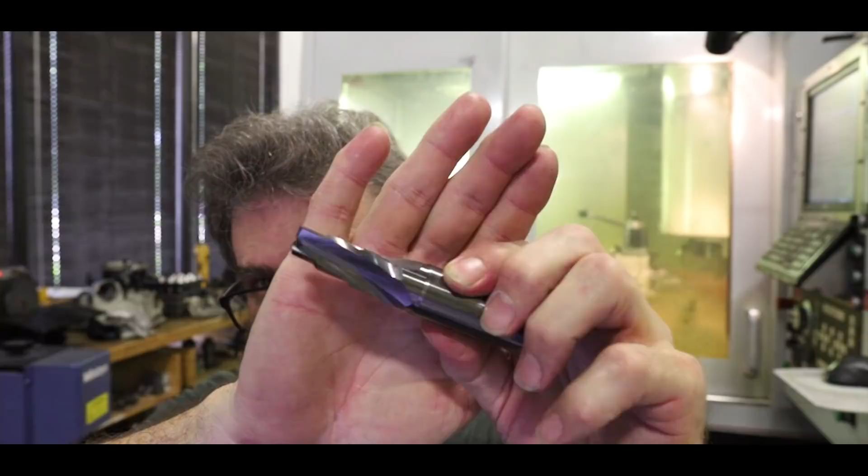Let me see if I can get the focus. This is a form tool of some sort to make some kind of a port. Not really sure what kind of a port it makes, but it's 7/8 diameter solid carbide, 4 inches overall, and they gave me the dimensions of this. I just got to grind it to their dimensions.

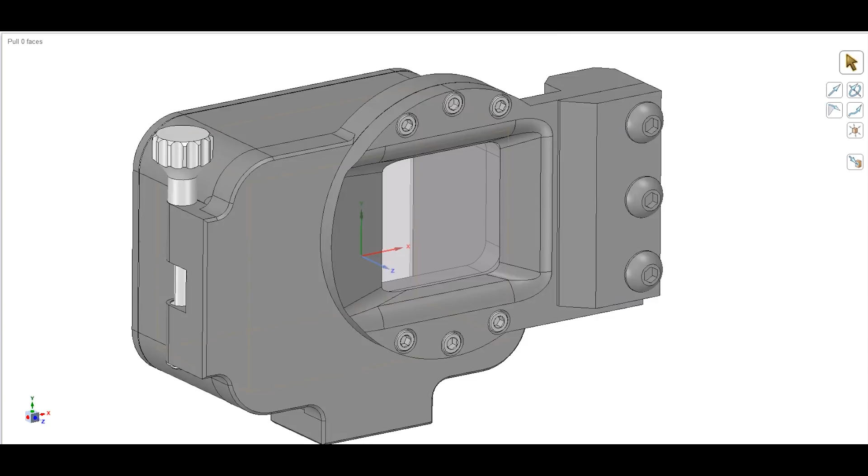Here's my latest idea on the GoPro case. It's to redo this front bezel area so that it works like my original idea. It's more or less the same. This would just mount on the front of the case as I've built it right now.

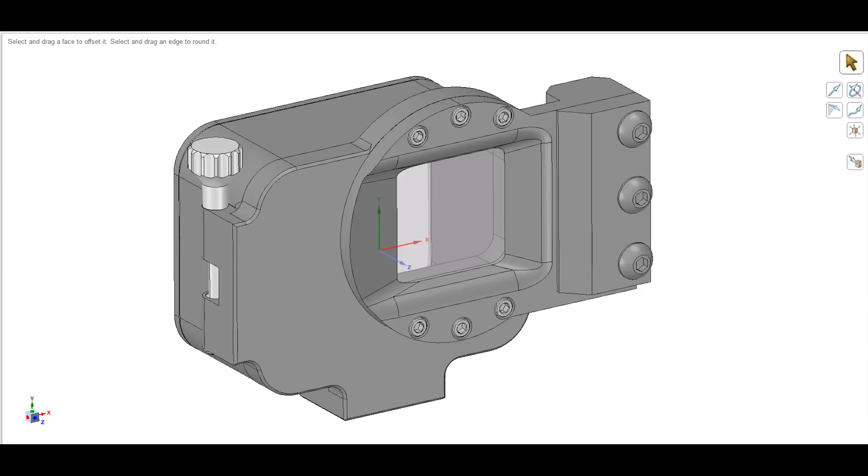So if we hide the various components, this is the original case that had the round air knife thing on the front of it, and we just mount this on the front here. Let me select this here, and we'll cut a section through here.

So the way this works is the air comes up through this fitting down at the bottom here. I'll put like a barbed hose fitting of some sort in there, the pipe thread, and it'll come out here, and it blows through this - there's a very thin gap.

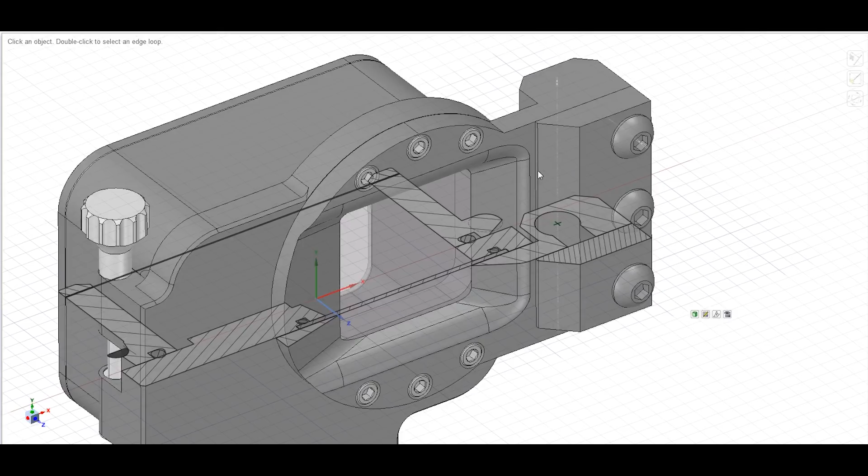On the first one, I put just a piece of Mylar packing tape and cut out the inside of it here so the air would blow through it. It left a gap of about 2.5, maybe 3 thousandths of an inch.

So the air will flow down and around this radius and down across the lens cover and then out here. This will work very similar to my original one I made for the GoPro Hero6 case. So this is the latest idea on this case I'm going to try, and we're going to see how this works.

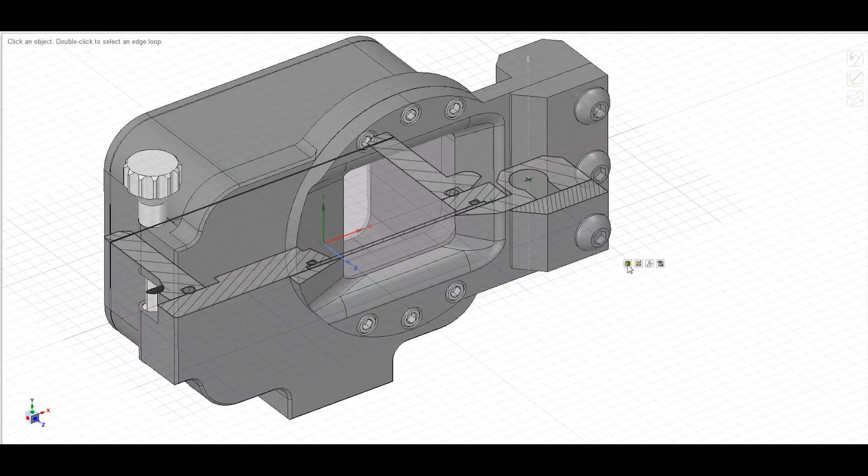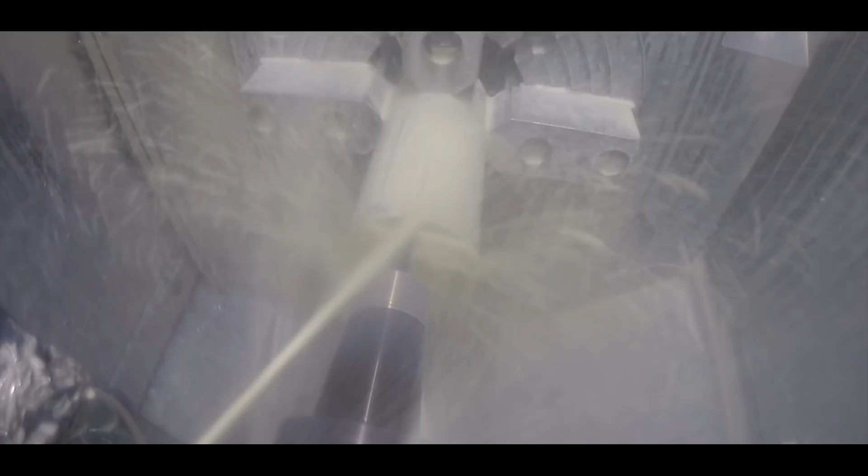Here's the start of the rear frame that holds the window on the body of the case. Just facing the bar off square. Come back here and mill out the outside shape of the part. I'm actually going deeper here than is really necessary for the part, but you'll see later on why I did that.

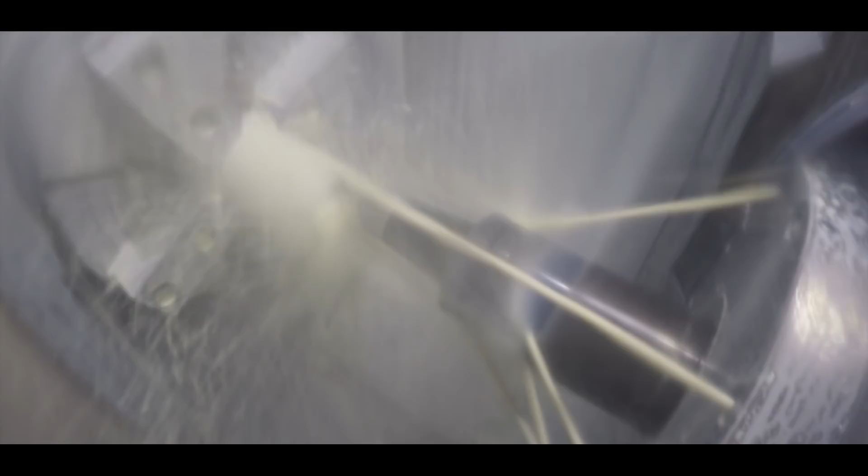So here's the 1/2 inch 4-flute end mill, just taking out the bulk of the material. There's a lot of coolant here, but I really can't mill this without coolant. On that aluminum, it would load up that end mill and cause problems. So then change to a 1/4 inch end mill just to finish the walls right here.

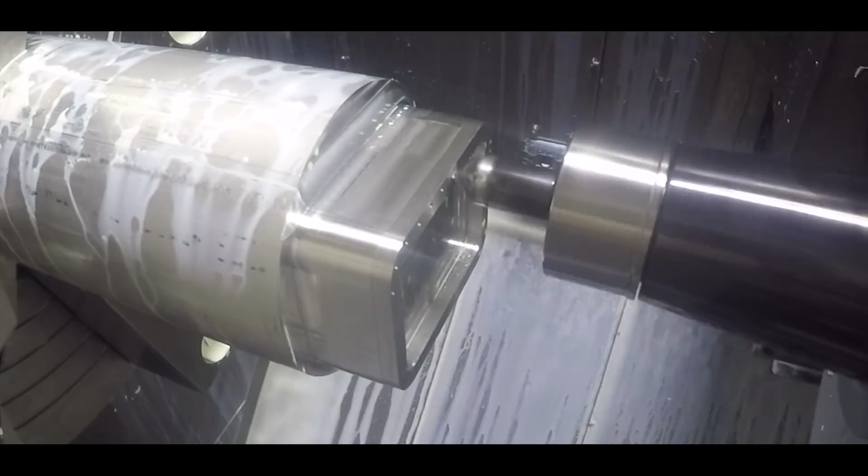Inside and outside. Come back with a spot drill for the hole for the screws. These are going to be 0-80 screws holding this back piece on, so they're pretty small screws. There's quite a few of them.

For some weird reason, the CAM software put a kind of unusual path there. There's these 2 holes that are drilled later afterwards for some reason, but I just left it alone. Here's the clearance drill for the 0-80 screws.

Come back with a countersink for the heads, and then compare it to the screw. Needed a little bit more, so ran the tool again. And then check it again.

It seemed alright, so I ran it all the way around. It's kind of hard to touch up a countersink tool because the point doesn't come to a real sharp point, and you have to kind of fiddle with the offset a little bit to get it the right diameter. So that's the countersink, and there's a little chamfer on the OD just to break the corner off.

And here's the 5-axis move just to cut this chamfer on the ID. I didn't have a chamfering tool and I didn't want to grind one with the appropriate angle, so I did it this way.

And here's the reason that I had to cut the extra clearance there. You can see that arbor would have hit the round bar on that saw if I hadn't milled it away.

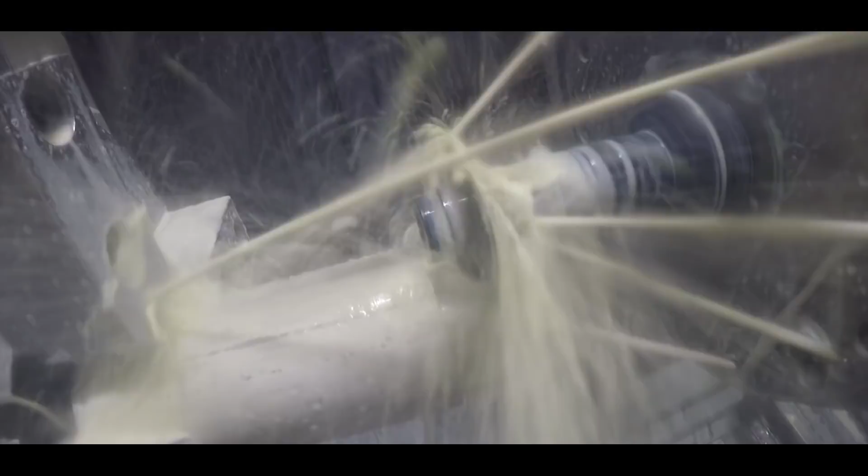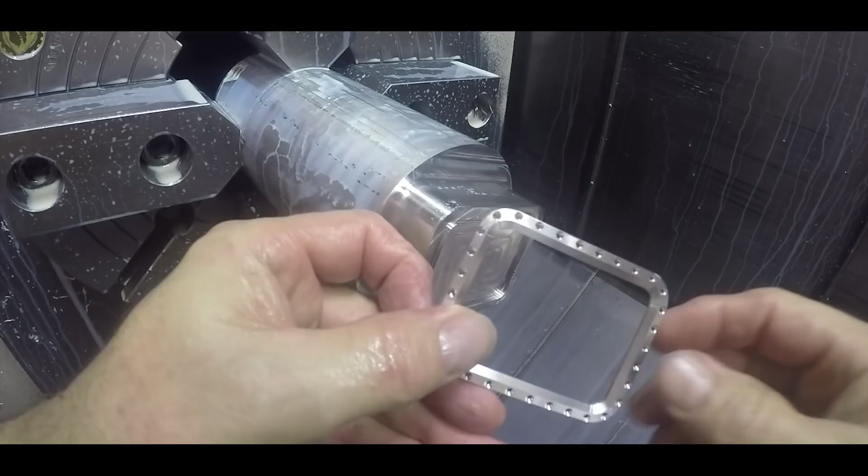So that's a little frame piece, I guess you could call it, that is going to hold the plastic window on the back of the case. It looks kind of like it's warped here, but I think it's the wide angle lens that's giving that impression on that GoPro camera.

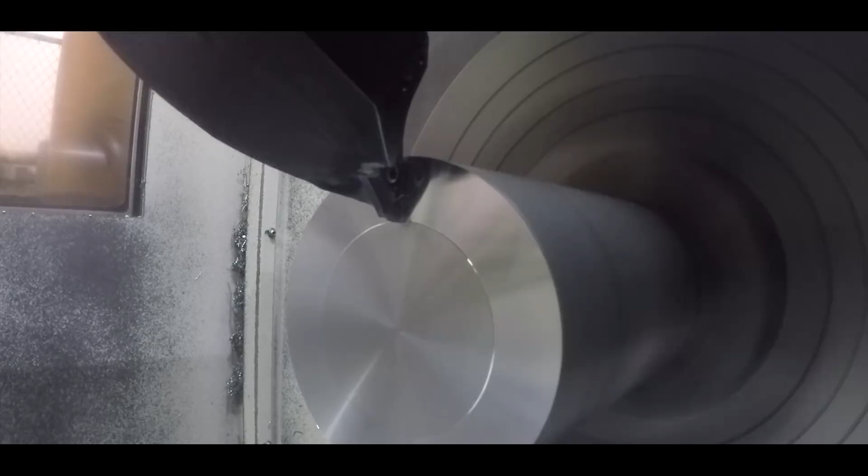And here's the back body that surrounds the camera. It's the beginnings, same as the last one, really. Just face it off square and mill it down with a 1/2-inch end mill. It's almost the identical shape of the last piece.

Actually, I think I did this piece before the other one, but I've got it out of sequence in this video. Here's the little dovetail O-ring groove tool. Cuts a dovetail on the inside of that groove so that the O-ring will stay in there.

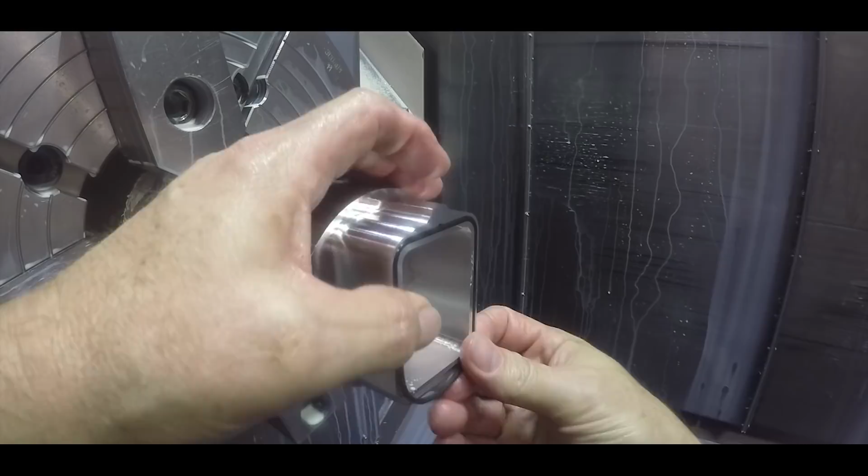I was trying the O-ring in the groove to make sure everything fit right, and that it stuck out a little bit so it would seal.

It looked good, so took it out, finished the rest of this off with a 1/2-inch end mill, roughing off the back where the hinge and the clamp boss are.

And come in with a 1/4-inch end mill to finish the radiuses that are smaller than the 1/2-inch end mill could do. And do a little surfacing there to cut an angle on the front of that boss.

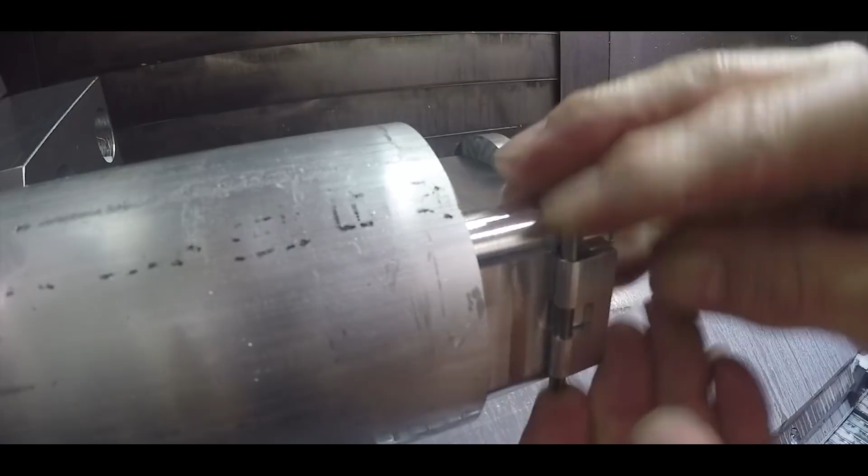Just trying the camera front piece. Went over to the horizontal mill to tap the 080 holes in the face that holds that little piece that holds the frame that holds the window on.

So here, facing it off to dimension on the height with a 1/2-inch end mill. And then come in and spot drill after I check the height is correct.

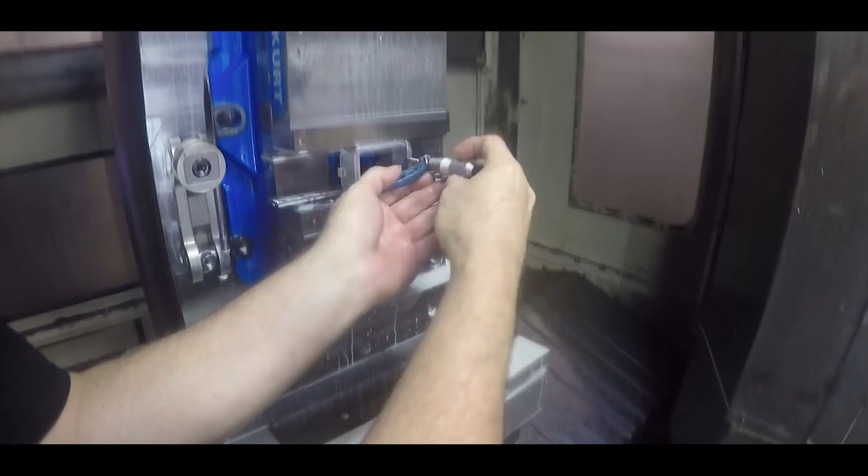Spot drill for the drill. Check to see if I got the right diameter.

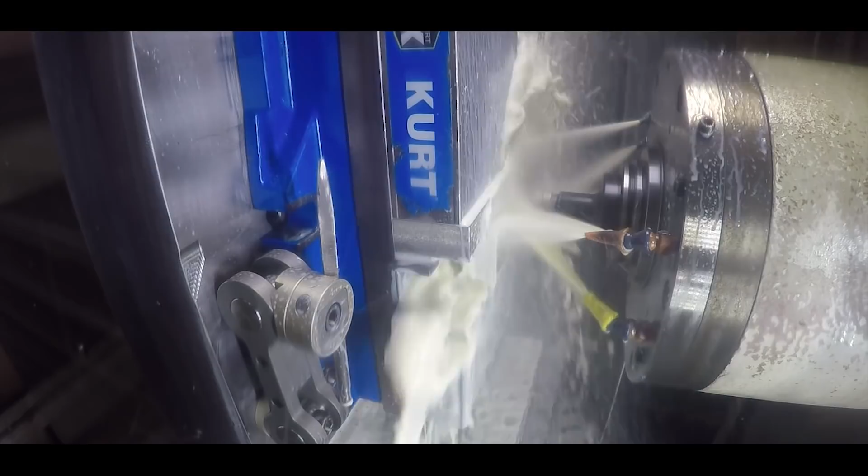There's quite a few of these holes in the back of this thing, and I was a little bit nervous about tapping all those 080 holes in this thing. That's drilling with the tap drill for the 080 tap.

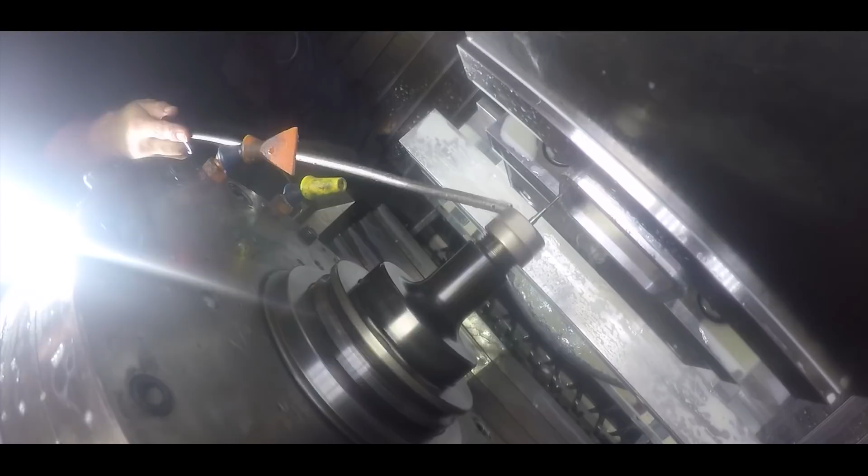Here's the 080 tap itself. I was putting oil and blowing it off on every hole. So a little bit nervous about breaking that tap, but it went all right.

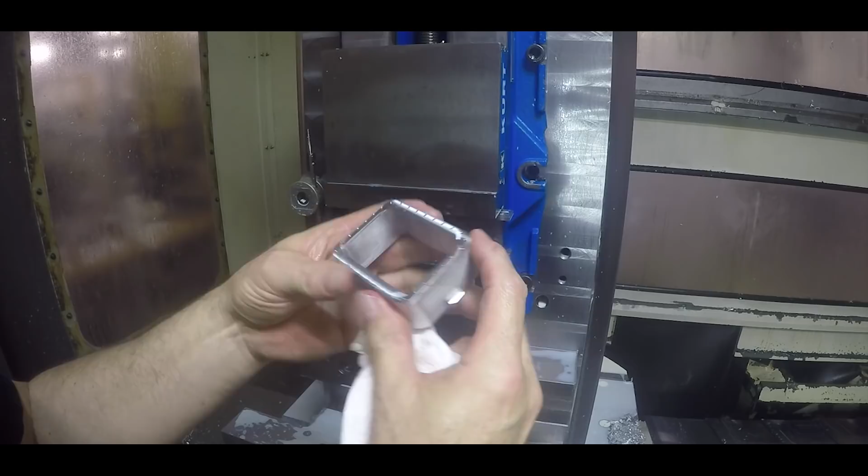So except for a little deburr, that's actually the finished part there.

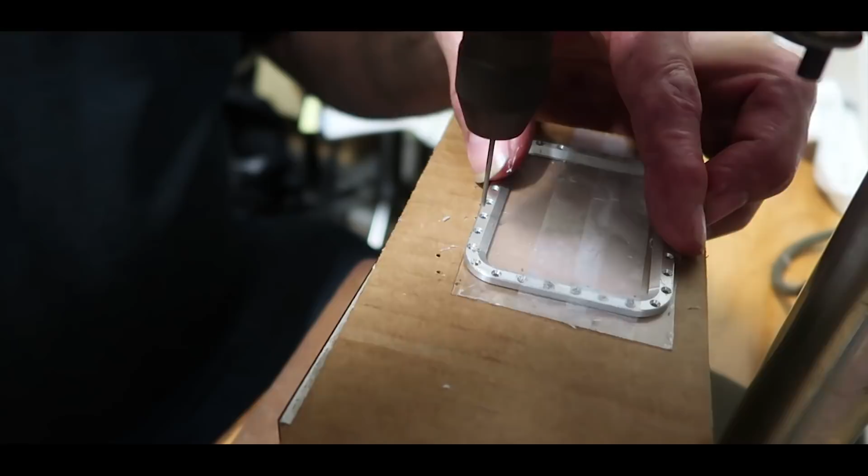And this was the easiest way to put the holes in the plastic. I just taped it onto the frame piece and then drilled the holes and then pulled it off.

And then screwed it all together with all of these 080 screws. I can't remember how many screws there is in there, but there's quite a few.

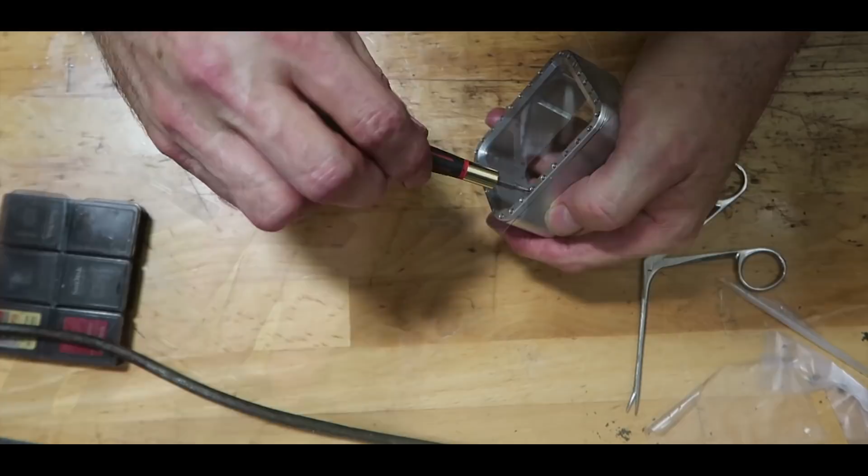And that seems to be working alright. It seals alright. That's a piece of 10 thousandths thick Lexan material. And the screws put enough compression on it, it acts like its own gasket. I didn't even put any sealer or anything.

I've been trimming off the excess with the scissors and the X-Acto knife. Okay, not too bad.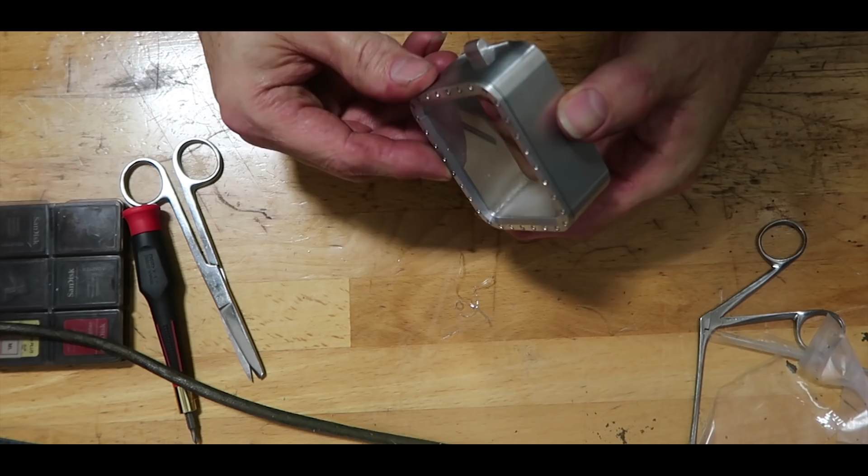See, the camera goes in here like that. And then it's going to clip underneath here and pivot together.

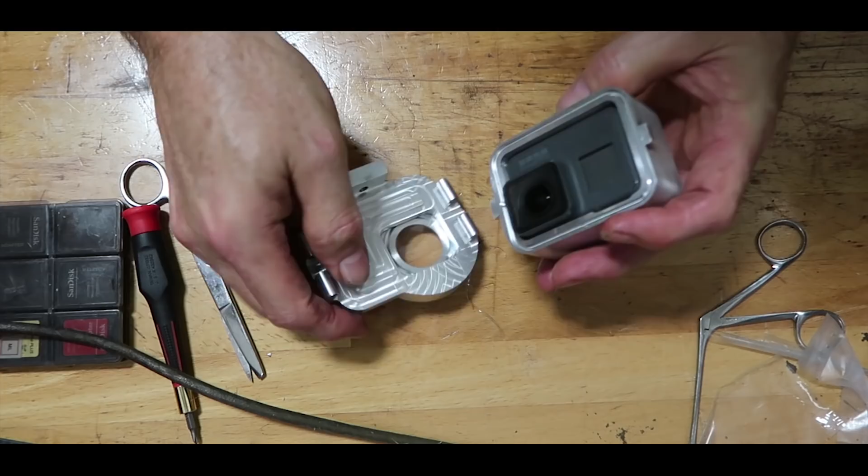See if I can operate the camera. Let's turn it on. Okay. Yeah, see, I can.

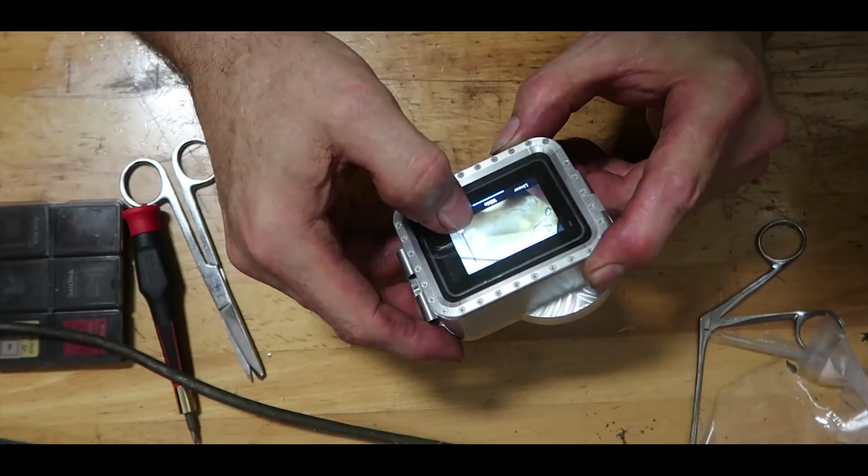I don't know if you can see that or not. See if I can get closer. I can actually operate the screen through here, sort of.

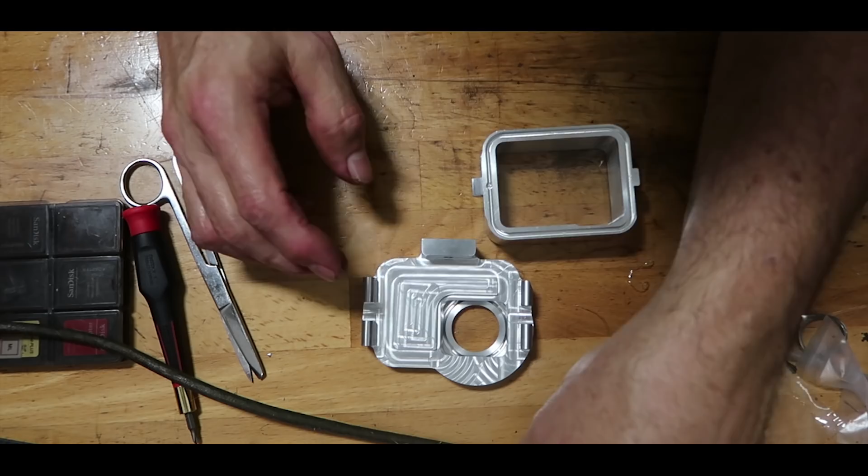This is how you get it out, you have to pivot it out like that. So that's it.